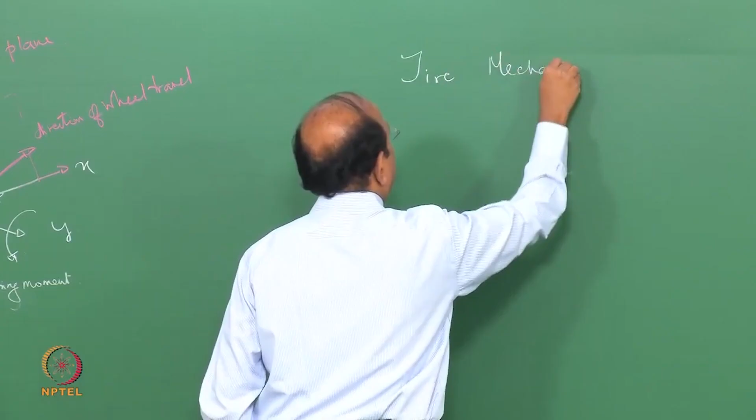Without delving much into that tractor trailer, you have done some assignments, so that will give you an idea. We will now move over to a very important and interesting topic on tires. In other words, we will understand what are tires, and then we will go ahead and understand the mechanics of tires. Mechanics of tires is a very interesting topic as well as a difficult topic.

Though one would say, what is in a tire, I see this every day in every car. What's so important about tires? If you look at an automobile, there are two components which are extremely abused to the greatest extent. One is the tire, the other is the piston rings. Both of them are abused in the sense that they are subjected to all sorts of loads, friction, and so on in their lifetime.

What happens between the tire and the road is extremely important for the safety of the vehicle, whether you are accelerating or braking, and whether you are taking a corner or maneuvering the vehicle. For all these things, what happens between the tire and the road is important. So in other words, we have to understand this carefully.

In the last class, we said that we will dump all the effects that happen between the tire and the road into one constant, and we call this as mu, and we said that this is friction constant or friction coefficient. I put that within inverted commas, friction coefficient, because it is not as simple as what this equation says or what happens in just a block. So friction coefficient is only a simple equation to depict the behavior of the forces, or depict the relationship between the forces. But the phenomena is very deep.

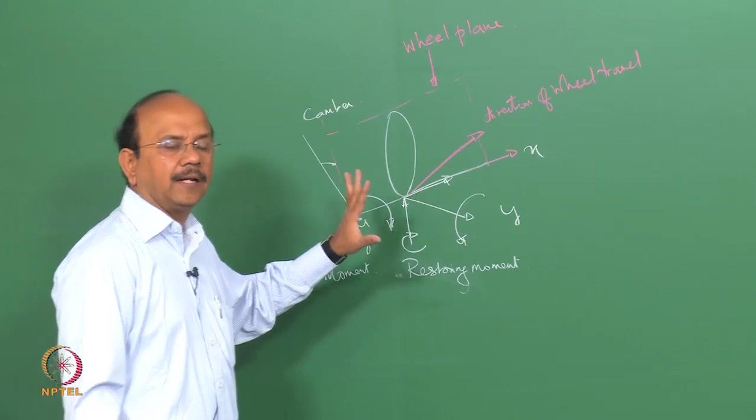Now, before we go further, let us look at just the forces that are acting on the tire. Since all of you have done a course on automotive systems, you know what is a tire and so on. I'm not going to delve too deeply into the specs of the tire, but we will maybe indicate this as we go along. We will not go into the construction of the tire and other aspects of materials, but we will suffice it to understand whatever is required. We will do that right now.

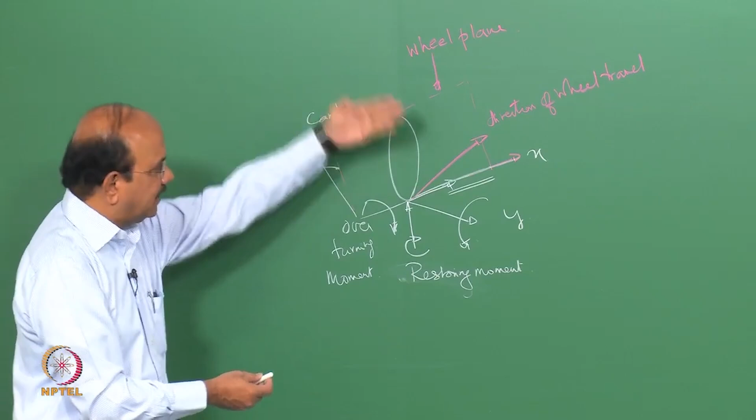So first let us look at the forces that act on the tire. There is a longitudinal force, which is in the x direction, but that force is not exactly along the wheel plane. Suppose this is the wheel plane, then you would see that the tire direction of rolling or travel is not exactly along that direction, but is at an angle which makes, say, lambda or alpha, and that angle is what is called the slip angle.

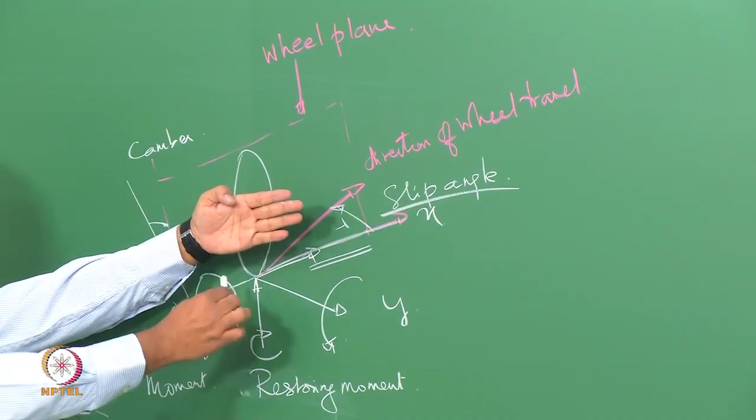Why is it so? We will see that in a couple of lectures. So the first thing is that it's very interesting to note that the tire, as it travels, doesn't go along the plane. Let's say that x direction is the direction perpendicular to the normal direction, or normal to the wheel plane. In other words, the tire does not travel along the wheel plane. It takes a direction that I call the direction of wheel travel, and that direction is at an angle of alpha, or lambda, which is called the slip angle. That's the first thing.

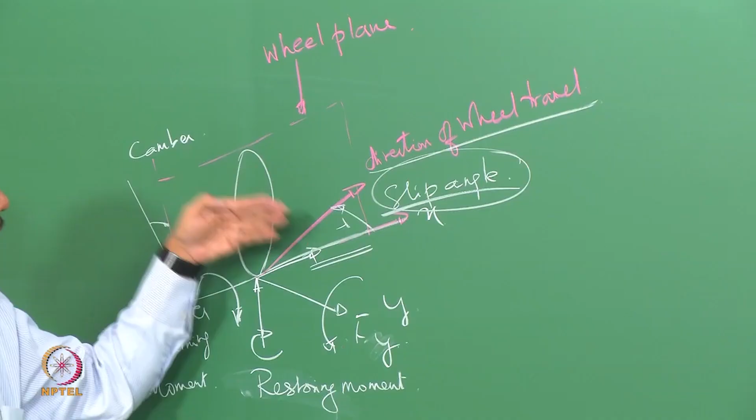There are a number of forces that act, as well as moments that act on the tire. Of course, there's a longitudinal force, along the x-axis. But we modified it by saying that whenever a tire travels, it may not travel along the x-axis. Now the slip angle is necessary to generate what is called a lateral force. If the lateral force is 0, the slip angle becomes 0, and the vehicle or tire travels along the x direction. So in other words, lateral force is developed because of the slip angle.

So we have let's call this as longitudinal force.

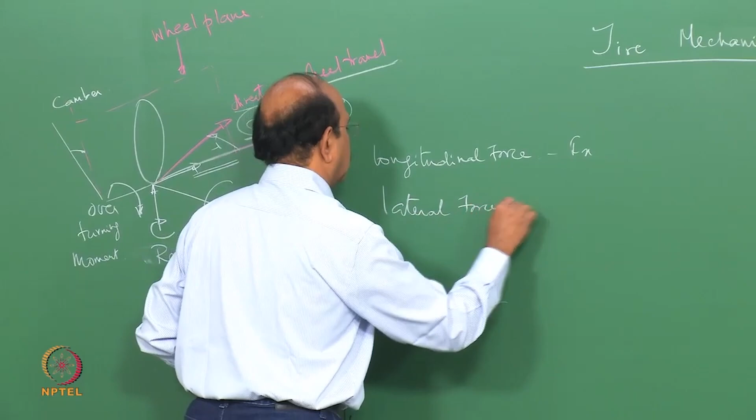That is the Fx force, that is braking, acceleration, and so on. Then we have the lateral force, which is Fy.

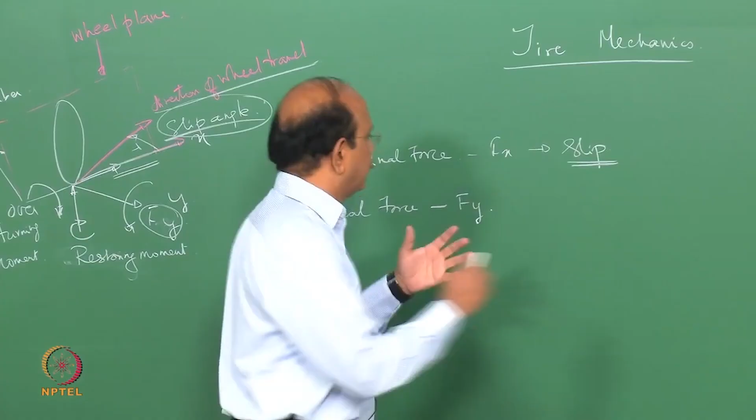This is the result of what is called slip. We will define all these things carefully. The longitudinal force is the result of what is called slip. Very interesting, when there is slip, a longitudinal force is produced. It sounds like an oxymoron, that when you slip, there is a longitudinal force developed. How is that? That's what we are going to see.

So there is a relationship between a longitudinal force and what is called a slip. What is called a slip? I'm going to define that carefully as we go along. So we have a lateral force Fy, and that is due to what is called the slip angle. In other words, when the lateral force does not exist, the slip angle does not exist, and the direction of travel is along the x direction.

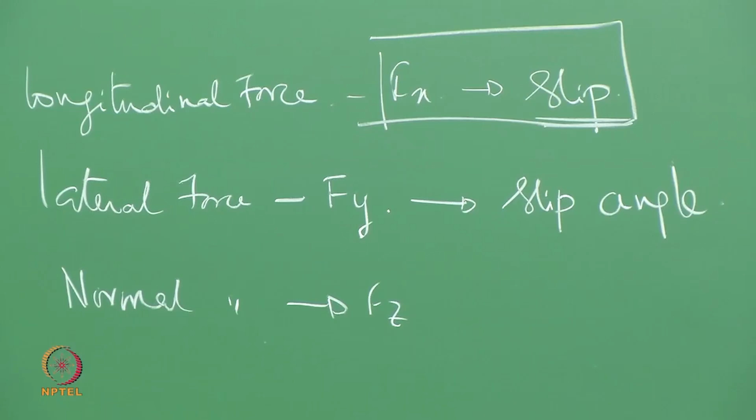Then of course we have what is called the normal force. Normal force, which is Fz, is normal to the ground plane. That is the ground reaction, as we called it in the last class. All the directions have an accompanying moment.

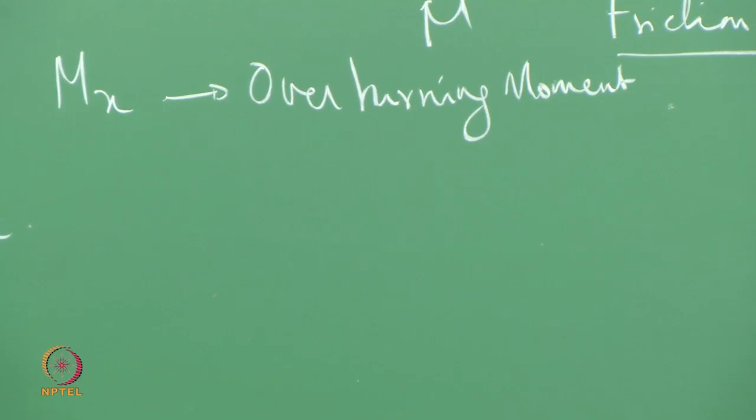Let's look at the Fx force. That Fx force is accompanied by what is called the overturning moment. I would call that Mx, and that is the overturning moment. You have a moment which acts along the z direction, which is called a restoring torque or restoring moment. So here we have what is called the restoring torque or moment.

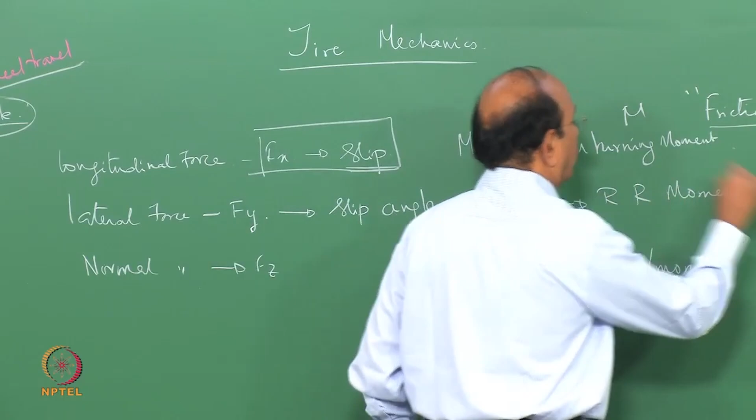And along the lateral direction there is a force as well as a moment, and the moment is nothing but the rolling resistance moment. We said that that moment or rolling resistance torque can be converted into a force that acts in the x direction. So we said that they are equivalent. You can't put both of them. So either there is a moment or there is a force. When we analyze vehicle dynamics, the whole of the vehicle, then we replace the rolling resistance moment by means of a force in the x direction. This is what we saw in the last class.

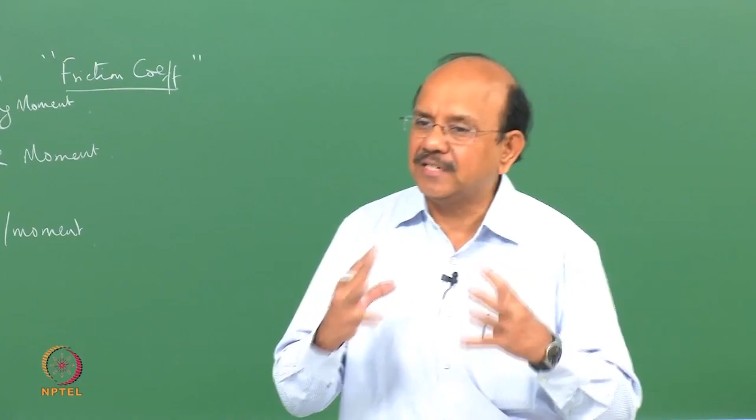So these are the things that happen in a tire. The question is, how is it developed? What is the mechanism of this development of these forces? That's what we are going to see.

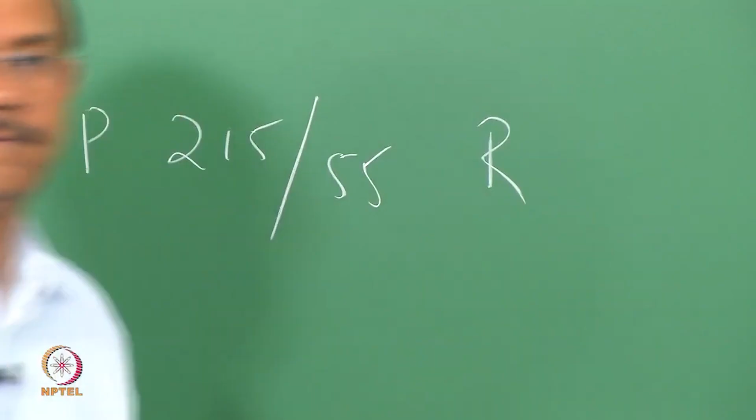All of you know how a tire is specified. If you go to a shop to buy a tire, for example a passenger car tire, you would specify something like 215, then 55 or 65, then R, and then another number like 15. This is what usually you would specify.

Sometimes you would go ahead and specify a number and a letter. Each one of them has a meaning. P is the passenger car tire. 215 is the biggest section width of an unloaded tire.

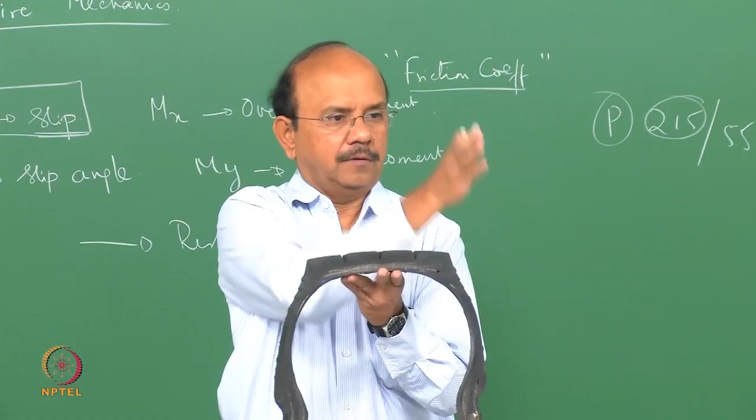Let's look at a section of the tire. So that's a section of the tire. This distance, the maximum width, is called the section width. So you specify that section width. Note that the section width is specified in millimeters.

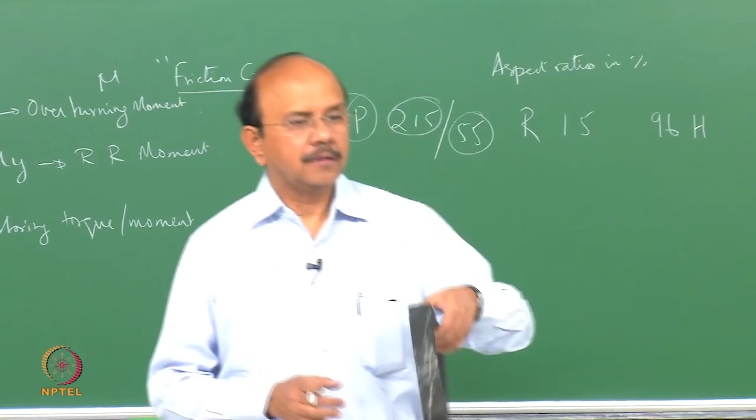Then you have 40, 55, 45, 65, whatever it is. That is what is called the aspect ratio, and it is in percentage. What is the ratio when we say aspect ratio? It is the ratio of the height here, which I would call HT, to the section width.

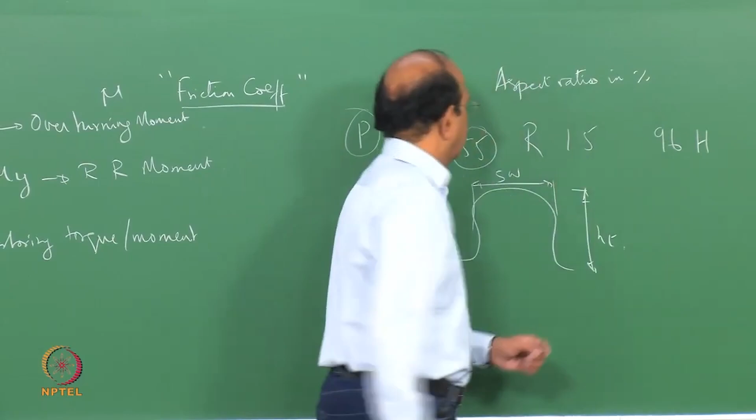So if I have a tire like this, then that is the section width, and that is the height. The ratio of the height to section width multiplied by 100, that is what is called the aspect ratio in percentage.

Lower the aspect ratio, it's called a low aspect ratio tire. They're colloquially called low aspect ratio tires. 35 is a very low aspect ratio tire. In fact, if you see today many high-end cars, you would notice that this height is very small. These are low aspect ratio tires.

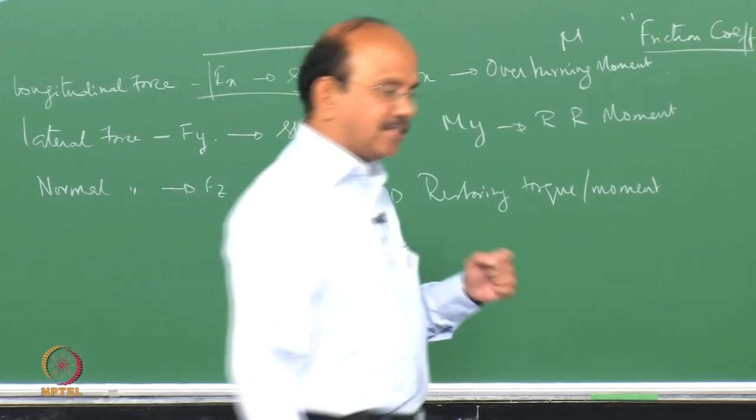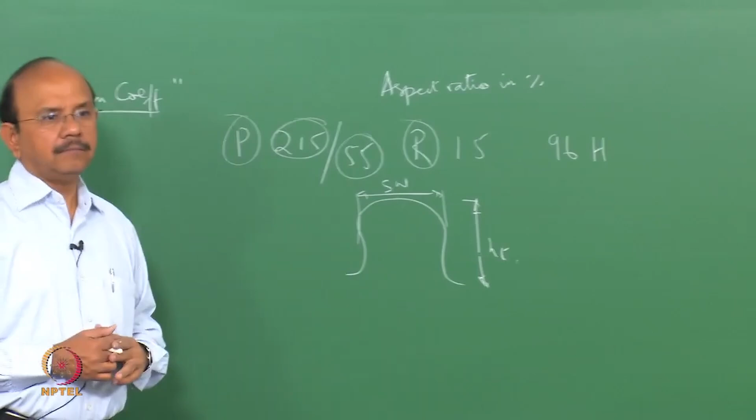R is what is called the radial tire. Today, almost all passenger car tires are radial tires. We still have tires which are not radial in the truck segment. That depends on the country. In North America, 90% or 95% or even more of tires are radial. But in a country like India, maybe about 25% of tires are radial, and radialization is still going on, where bias tires are converted into radial tires. We will see what is a bias tire and what is a radial tire in the next class through some pictures. We'll just note that two types of tires exist: one is a radial tire and another is a bias tire.

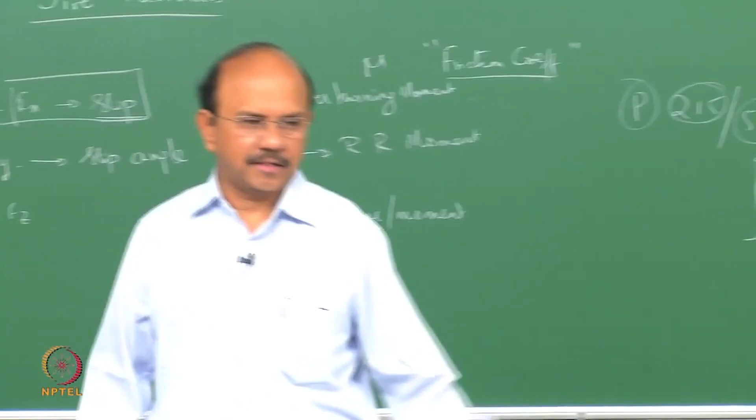We'll just quickly see a section and see what the radial tire is, but we will go from macro to micro. Now, 15 is the rim diameter in inches. So that's the rim diameter in inches.

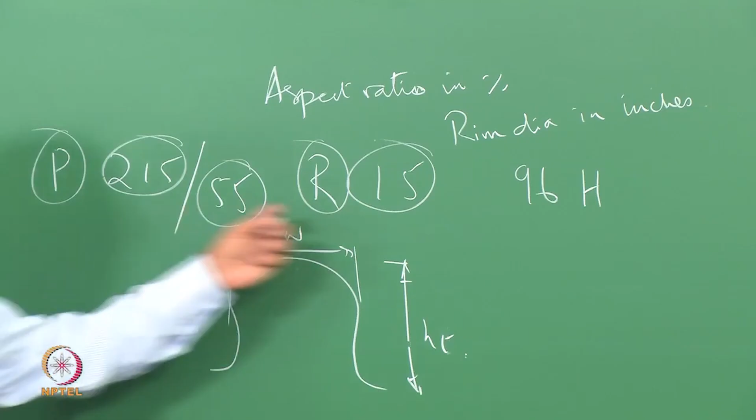Due to some peculiar history or legacy, you have mm combined with inches when you specify a tire. Then you have a load rating—you have a table from which you can find the load rating of the tire. And then you have what is called the speed rating. So you have a load rating and a speed rating.

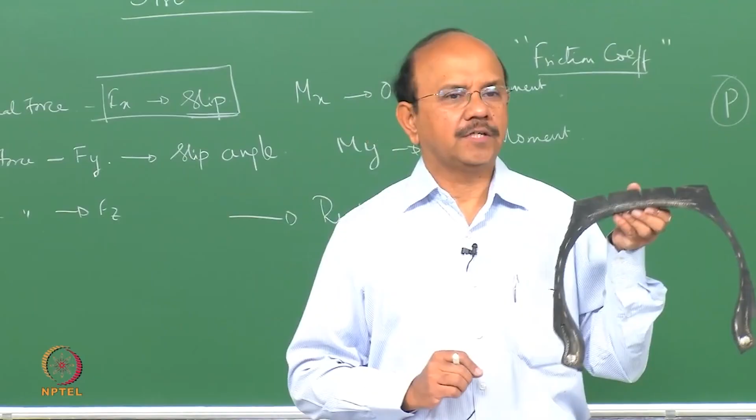A quick look at the section before we go further and explain the micros. That's a typical cut section of a truck tire, courtesy JK Tires, one of the leading manufacturers. You would notice there are a number of reinforcements, and these reinforcements in this tire are made up of steel. You would also notice there are chunks of steel on either side—actually that's what is called the bead. So the rim is here, the tire sits on this rim and it is inflated.

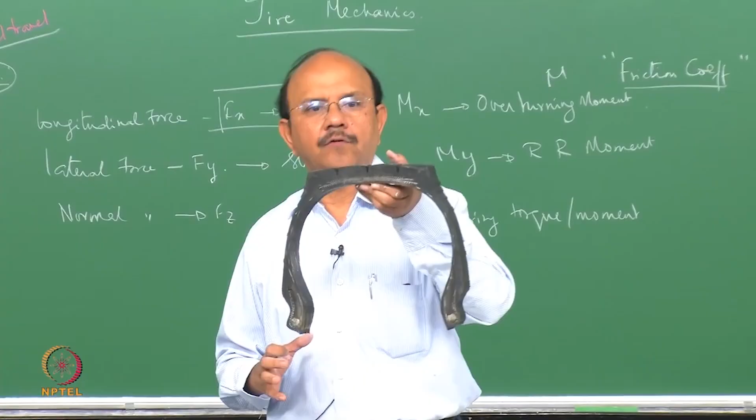There are a number of parts of these tires. We will explain that in the next class, going into the details of what material the tire is made of, how it works, and then look at the different parts of the tires. The way the reinforcement is done, first of all it's not pure rubber—it has reinforcements. Based on how the reinforcement is done, the tires are classified either as a radial tire or what is called a bias tire.

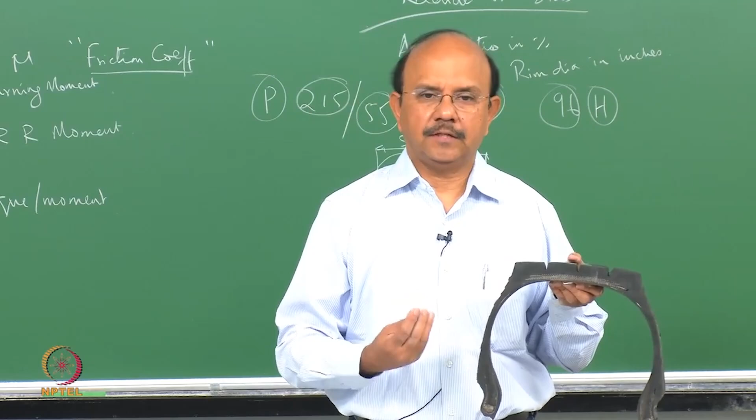Though you see that they are all steel radials, it is not necessary that all the reinforcements are made of steel. Some of the reinforcements, a section of which we will see in the next class, are made of polyester materials, and the belt, as it's called, has reinforcements made of steel. So you can have a combination of materials which reinforce this. The reinforcements are basically made up of steel, nylon, polyester, rayon, and so on.

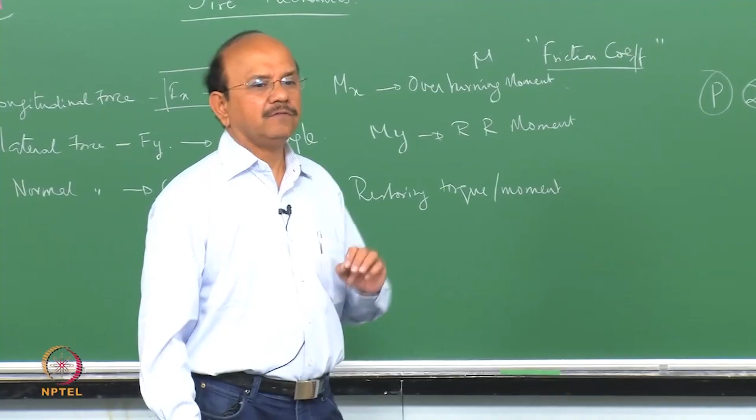Before we delve deeply into tire per se, we will go from the material of the tire to the construction of the tire, just to give you a background. So let's now look at what the materials are and how they behave. All tires used in automobiles basically consist of what are called elastomers.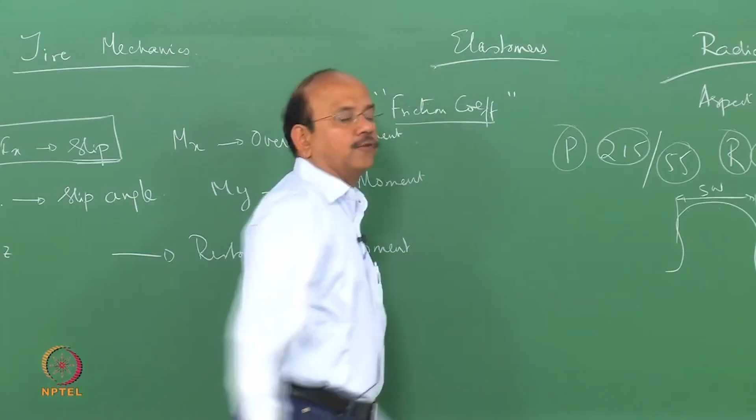Tires are classified into pneumatic tires, which we use all the time, or solid, non-pneumatic tires, which have very specific applications. In this course we are going to look only at pneumatic tires. So the first thing is to understand elastomers and how they help tires develop the forces required to accelerate, brake, take a corner, or maneuver, and so on.

We will go into small bits of information which we will collate together in order to understand how a tire interacts with the road. In other words, we will understand the elastomer, we will understand the road, then we will understand how these two talk to each other in order to develop the forces that are required.

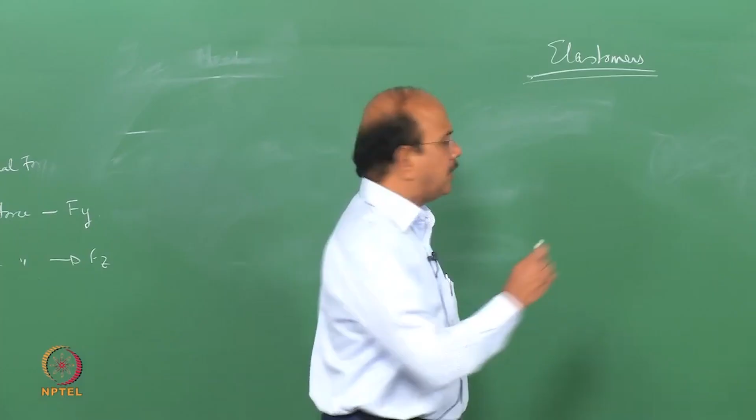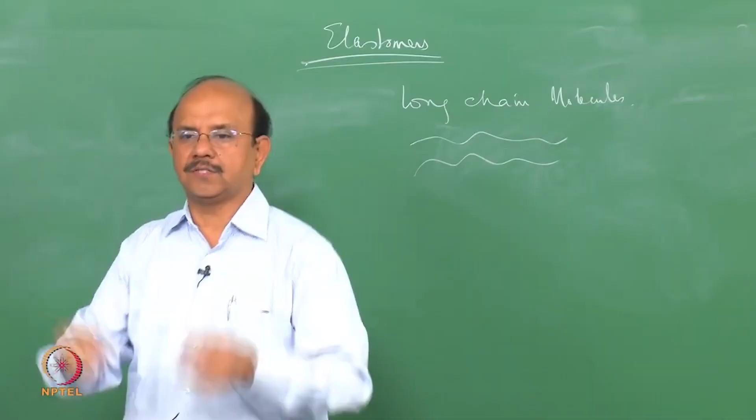Now, what are these elastomers? The elastomers are basically long chain molecules. These long chain molecules are vulcanized through what are called sulfur bonds. In other words, these long chain molecules do not exist independently—it's not that there's one long chain molecule here and another separate one there. These long chain molecules are bonded by sulfur bonds, and that's what we call vulcanization. Now if you leave this long chain molecule alone, it becomes something like a bundle of twine or wool or something like that.

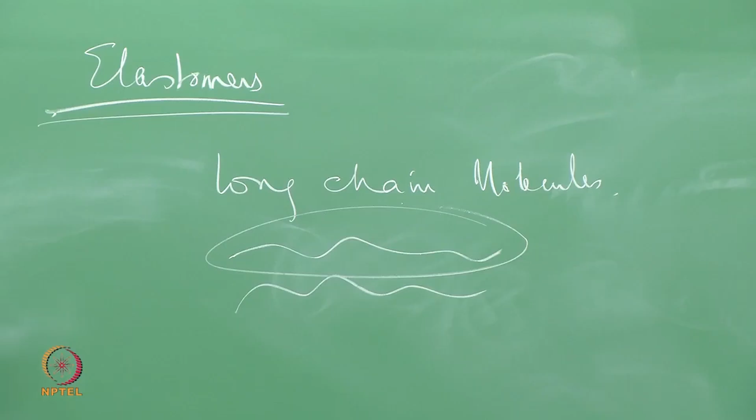It's very interesting to note how they behave independently and how that is different in their behavior when it comes to these molecules. These molecular environments have other molecules as well. In other words, it is interesting to know the difference between how one molecule behaves and how a number of molecules or molecular chains behave. Now, if you look at one molecule...

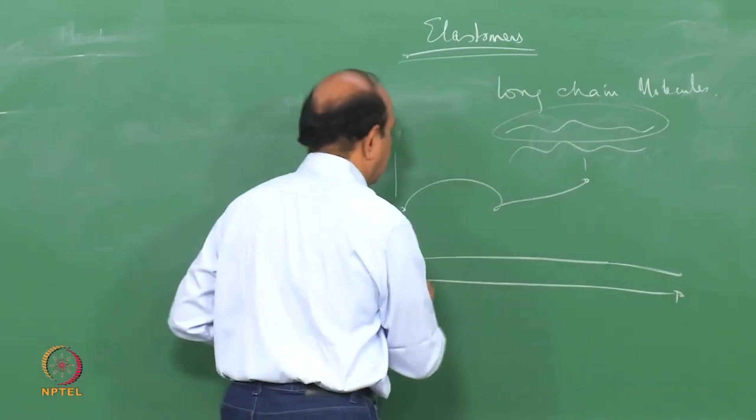Now, when I stretch it, that's the final length. The first point you have to notice is that this stretching is different from the stretching that you would notice in a metal. For example, if you look at steel, steel does not have molecules like this, obviously, and the elastic behavior of steel is due to what is called lattice deformations.

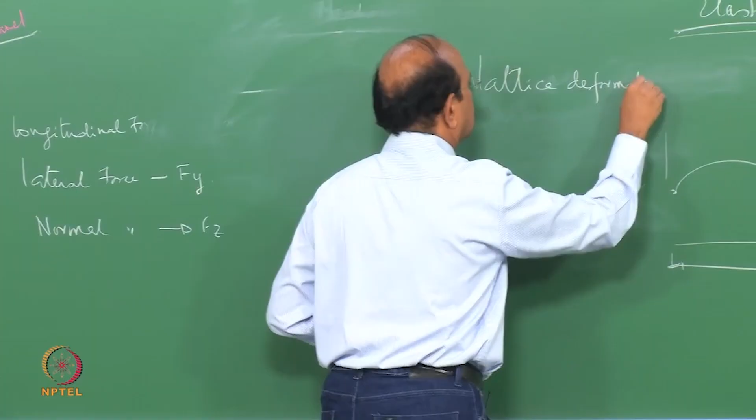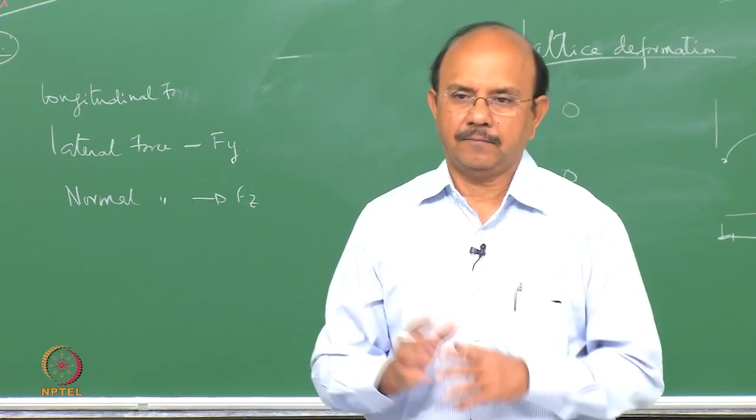You also know that the plastic deformations are due to a phenomena called slip, and slip is due to the presence of dislocations and so on.

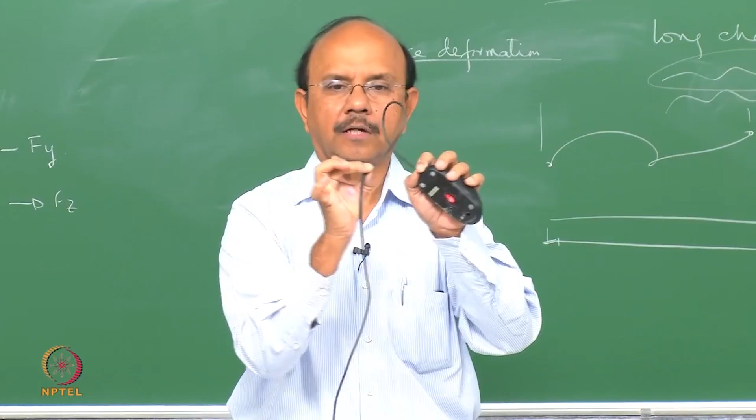Look at this. So you have a wire, say for example, if you take the mouse, let's say that this is the length from my left hand to right hand. This is the length of this long chain molecule as you see it outside. So now let's see what happens. When I stretch it, look at how much I'm able to stretch. Look at how much my hand moves. Actually I am not disturbing the bonds like what I did in the previous case.

What I did was to straighten this out. Look at that difference. So the phenomena of deformation of an elastomer is different from that of steel, and the phenomena is controlled by our good old entropy.

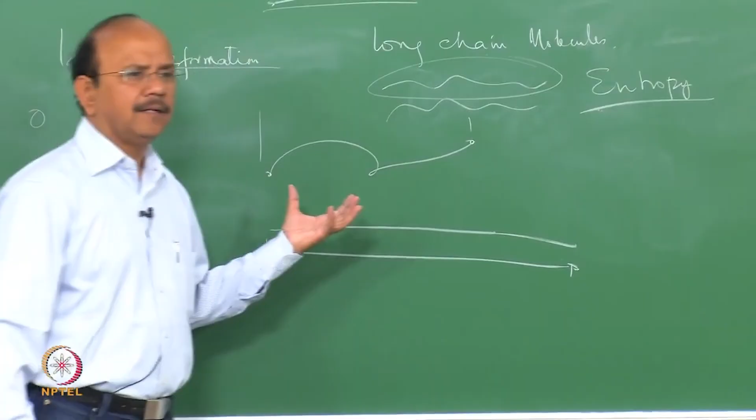By entropy. Now you can imagine that the entropy, which you normally understand it to be - higher the entropy, you would imagine that a very simple way of understanding entropy is that higher entropy means there's more chaos, more disorder, and so on and so forth. This is what you roughly understand, forgetting about the mathematics.

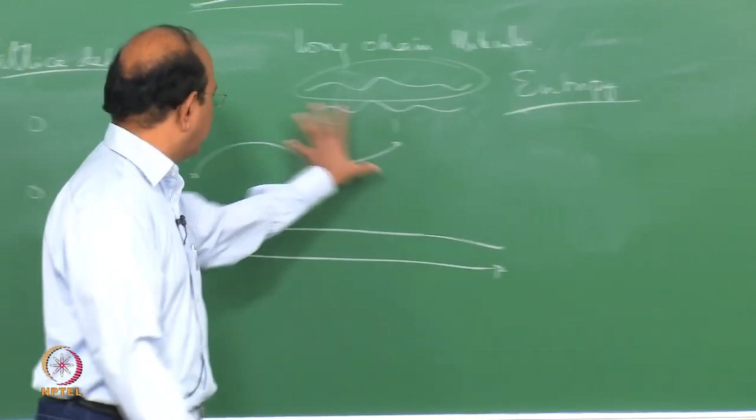Here we say that it is the configuration which decides the entropy. When it becomes straight, the number of configurations that this molecule, this macromolecule, can take is limited, and so the entropy actually drops. So when I leave it, the entropy actually increases, and so it goes back to this position. In other words, there is an entropy change that is responsible for the deformation of these macromolecules.

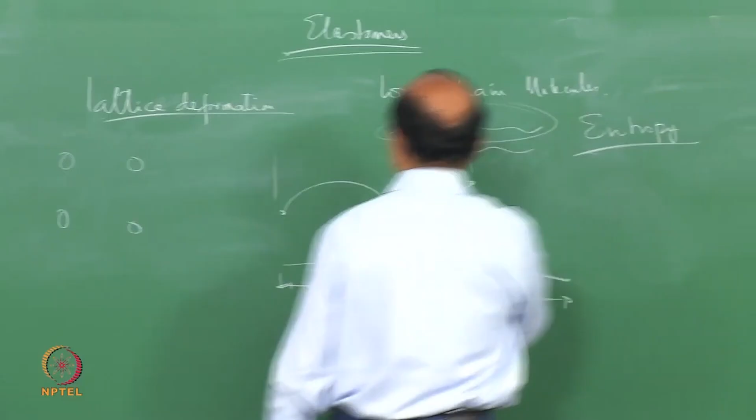So at one level, you can imagine that these molecules are like a spring. You can say I will fix it here, I will pull it. When I pull it, it becomes like this, and then when I leave it, it goes back to this position.

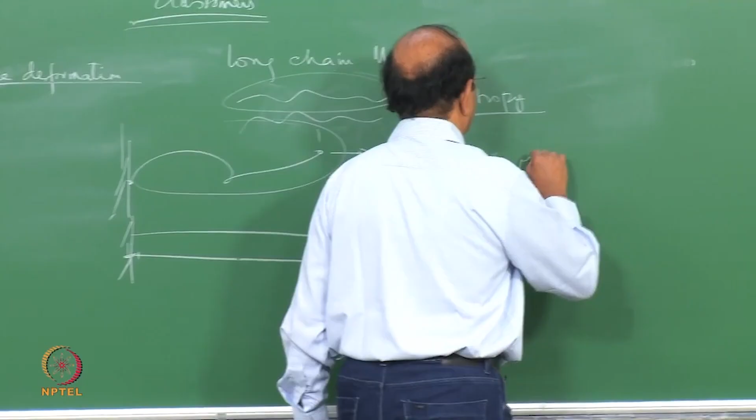You can imagine the same situation when you have these springs which are bonded by sulfur. So if I have a spring bonded by sulfur here, a spring bonded by sulfur here, this spring bonded by sulfur, this spring bonded by sulfur, and so on. This keeps increasing, and so you apply a force and a similar thing happens.

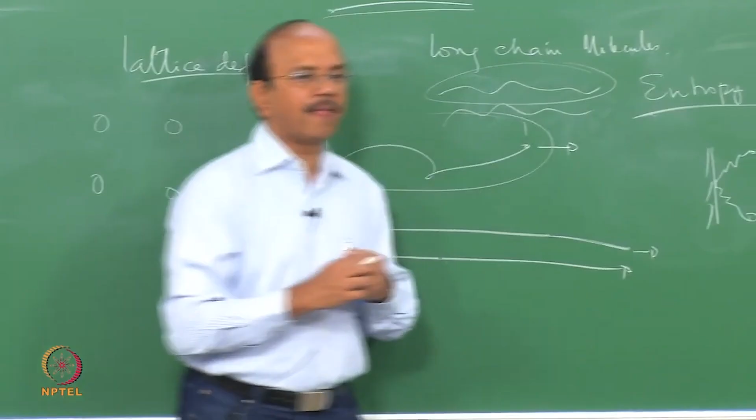So on one hand, this can be modeled as a spring. Don't forget that these are long chain molecules, though they are bonded, they are not arranged neatly like that. So when they are pulled, these long chain molecules start interacting with one another or with itself and so on. In other words, the long chain molecules have some sort of friction - it's not actually friction, but you can say it's some sort of a friction between the other molecules.

So when I pull it, they also interact with other ones, and that gives a very interesting effect, which is the viscous effect or the dashpot effect - the viscous effect or the dashpot effect.

You can, for a moment, imagine that these molecules are in a tube. This is called the tube model. The elastomer consists of a number of tubes into which these molecules are placed, and these tubes start interacting with one another as the chain goes.

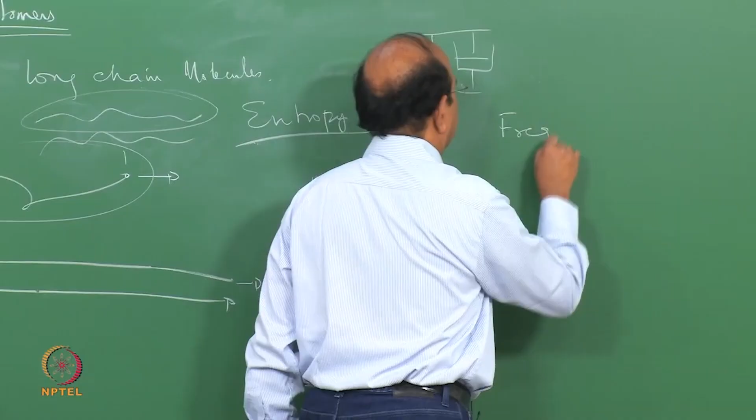Because of this interaction, there is a viscous part. Two factors become important in their interaction: one is what is called frequency, the other is temperature. These two become important, and interestingly, the mechanisms are similar, hence there is a relationship between the two.

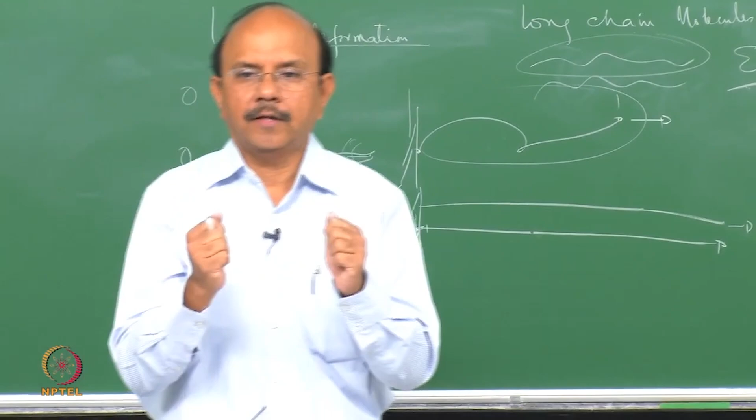What do I mean by frequency? Frequency tells me how fast I'm going to pull and release it. I can do that slowly, say 1 cycle per second, 10 cycles per second, or I can do it very fast, at 10 to the power of 8, 10 to the power of 10 cycles per second. Now what is the effect of this frequency on the mechanism of interactions?

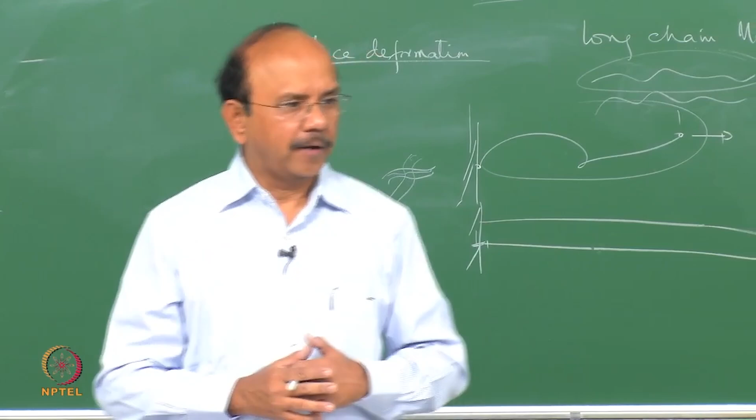At very low frequency, since we had a viscous effect, which means velocity plays a role, when you apply the force, the chain has time to react to that force, and hence it would react almost in the same fashion as you applied it. Since you release the force again slowly, it has time to react and come back to its original position.

So at low frequencies, the time available is quite large, and because of that, the molecules have the ability to expand and then come back. In other words, at low frequencies, it behaves something like a spring, and so all the forces are dumped into the spring.

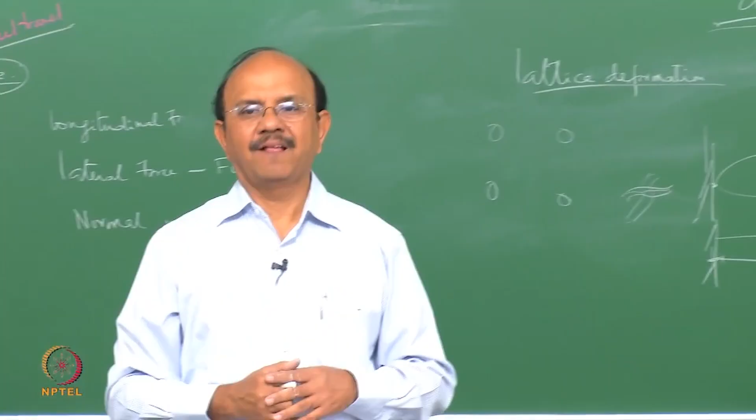So the force here, say for a very simple model, is kx, where x is the displacement, and for a dashpot it is always cx dot. So the forces that act are able to get back—in other words, the whole rubber behaves like a spring.

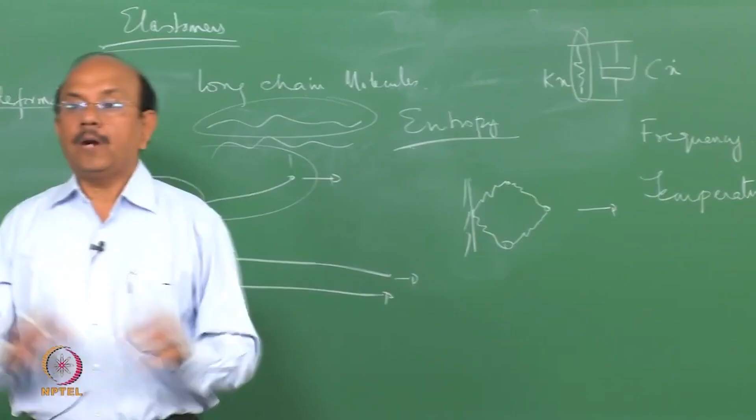What happens when I increase it? Let's look at the other end of the spectrum, where I'm applying the force at a very high frequency. Then the material does not have time to get back to its original shape.

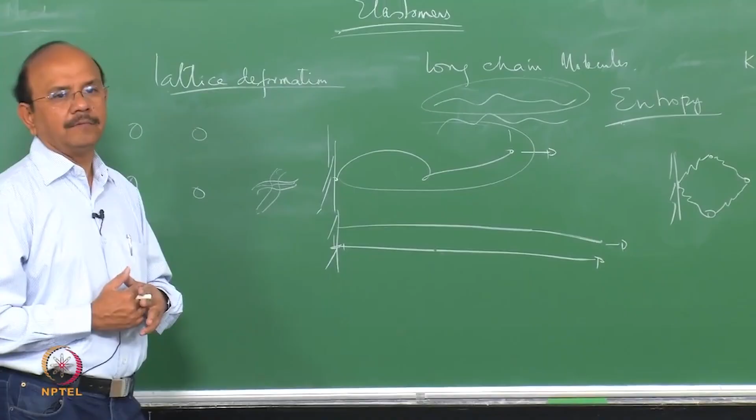Because by the time it gets back, you've applied the force again—it's a viscous effect, we said. So what happens? It would behave like a very stiff material, because when you want to release it, it doesn't come back, and when you apply it again, it won't go back. So it becomes very, very stiff.

So at very high frequency, the material behaves as a very stiff material. In between the two: at very low frequency, it's a nice spring because it has enough time to recover, and at very high frequency, it doesn't have time at all to recover, hence it becomes very stiff. In between the two, it has both a spring and a dashpot effect.

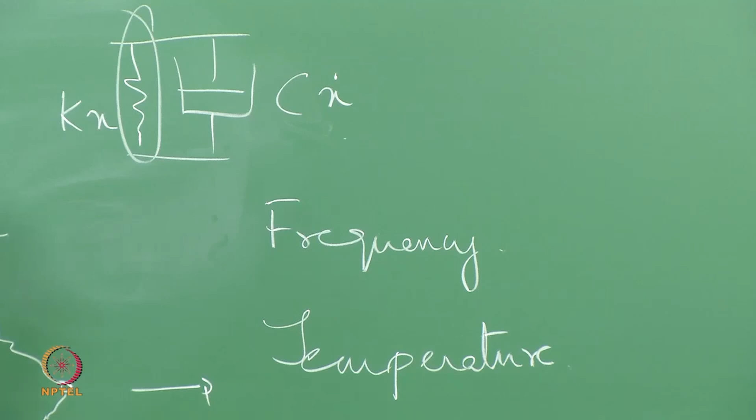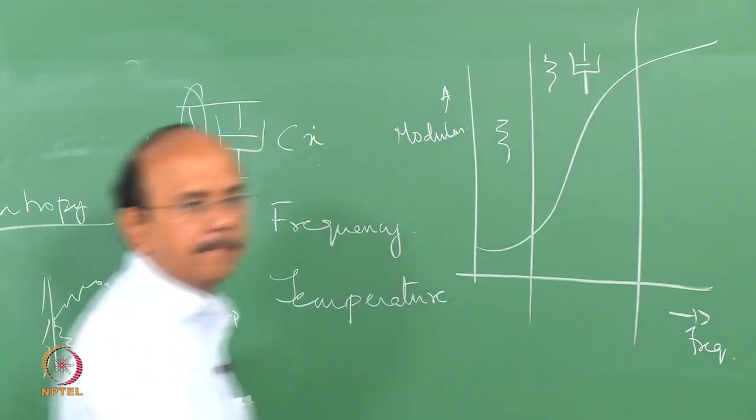So if I now plot frequency versus what we call the stiffness, or modulus, how would it be? It would be like this, and like that. Here is the spring region, here both effects are present—spring and dashpot—and here it is quite rigid.

So these are the three effects. To summarize: at low frequency, the time required is good enough for the rubber molecules to come back, so they are springs. At higher frequencies, they don't have time, and hence become rigid. Our region of interest in this whole thing is this middle region.

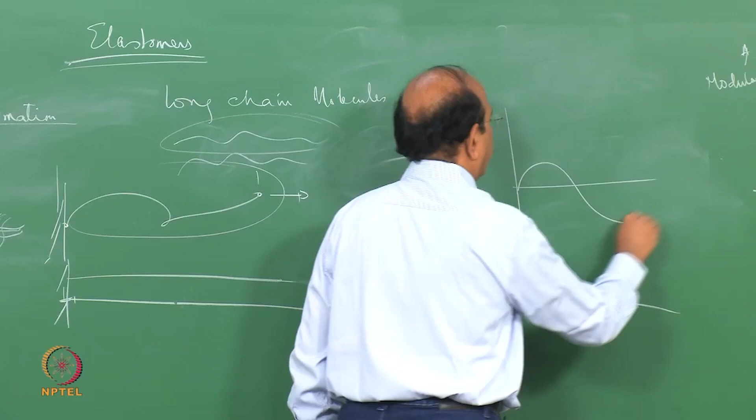If I now plot a stress-strain curve for that region of interest, which I would call the viscoelastic region, how would it look? Let's say I apply the stress like this—then the strains do not follow the stress. If it were an elastic material like steel, the strains would follow directly, with the ratio being the Young's modulus. But here, because of the viscous effect, there is a time delay.

There's a time delay between the stress and the strain, or in other words, there is a phase lag between the stress and the strain. That phase lag is what gives you what is called hysteresis, an important property of the rubber, which gives advantages and disadvantages in the functioning of the tire.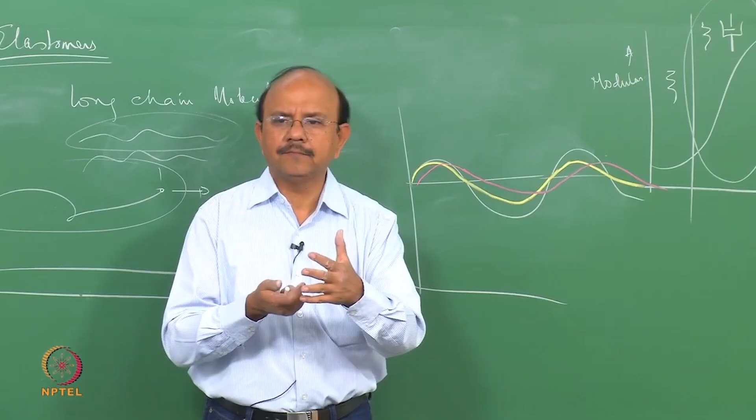So in other words, what does it mean? It means that when I apply the stress, the strain is not immediately developed. It takes time to develop. When I release it, it doesn't immediately get back to its original position. It takes time for it to get back to its original position. This is a very important property which we will see more and more.

We will call this phase lag as delta. This is the phase lag between the stress and the strain. Now let us look at the effect of temperatures and then get back to this again.

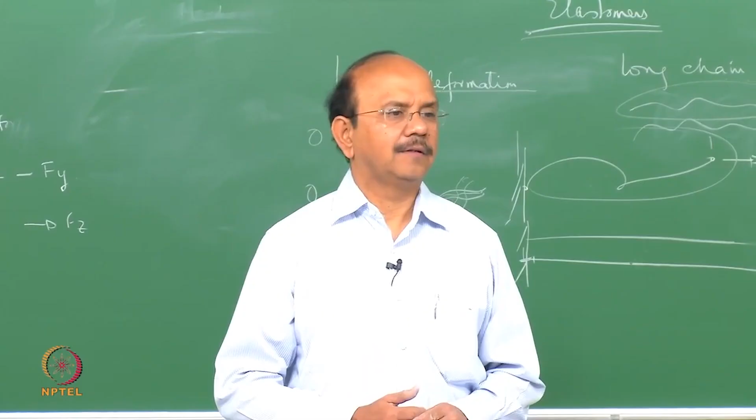The temperature has just the opposite effect. When the temperature is high, the temperature aids these. So let's say I'm fixing the frequency and taking the temperature to be high. What would happen? When the temperature is high, it aids in the recovery of these molecules to its original shape, and hence it would behave as if you are at a low frequency.

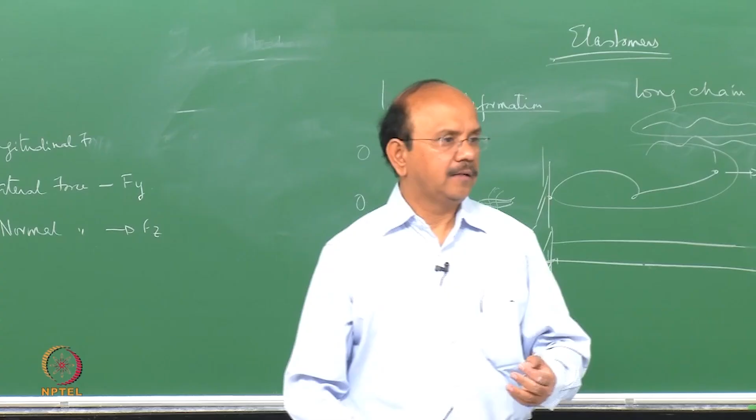So if I now plot the temperature, at high temperatures, since it aids the molecules to recover, the modulus would be something like this. At very low temperatures, what would happen? Just the opposite — the molecules are under difficulty to get back to its original position, so the modulus is high. At intermediate temperatures, the modulus is between the two.

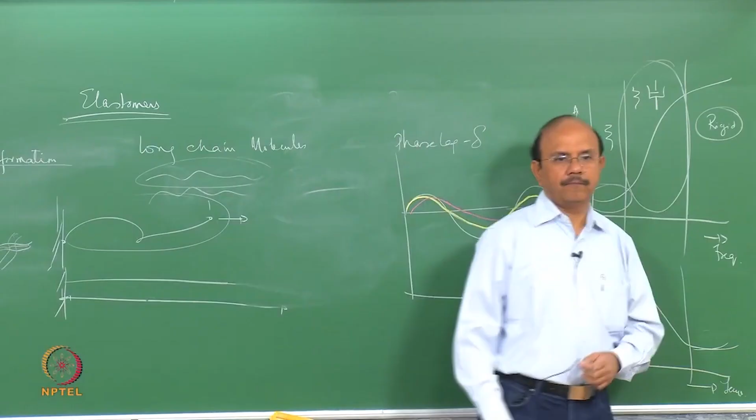So if you compare this graph with this, you would notice that the temperature effect is the inverse of the frequency effect. We will see that there's a relationship between the two, which is called the WLF relationship.

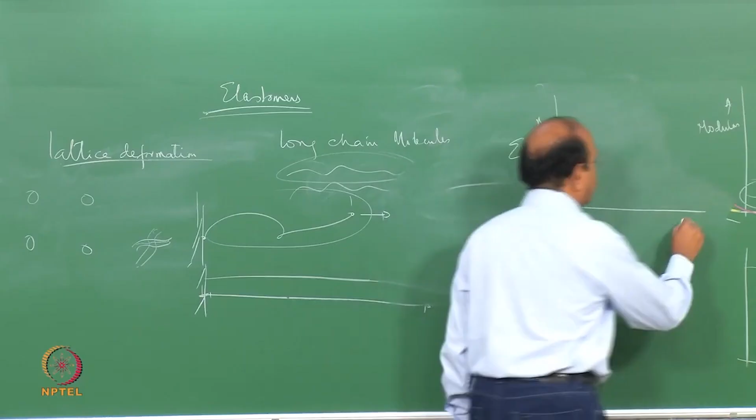Now, if I plot for the frequency effect, the energy loss versus the frequency, then the curve would look something like that. There is a central region at which the energy loss is high — that's that region, and that's the region at which we are going to use our tires.

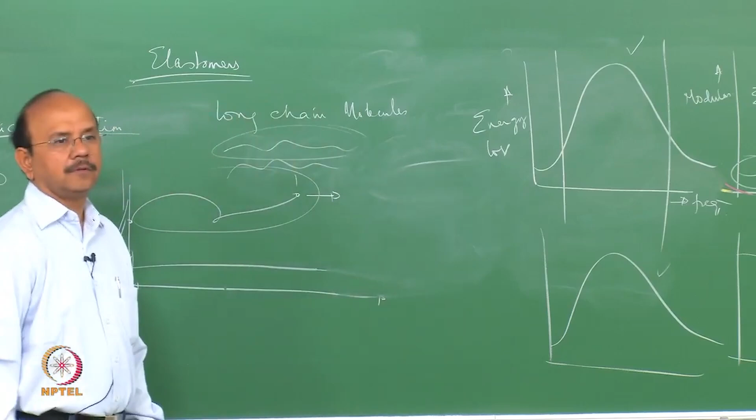The same case for temperatures would also look something like this. The temperature also has the same type of behavior. There is one particular temperature of interest called the glass transition temperature, popularly denoted by Tg, below which the material is vitreous and above which the material becomes very soft.

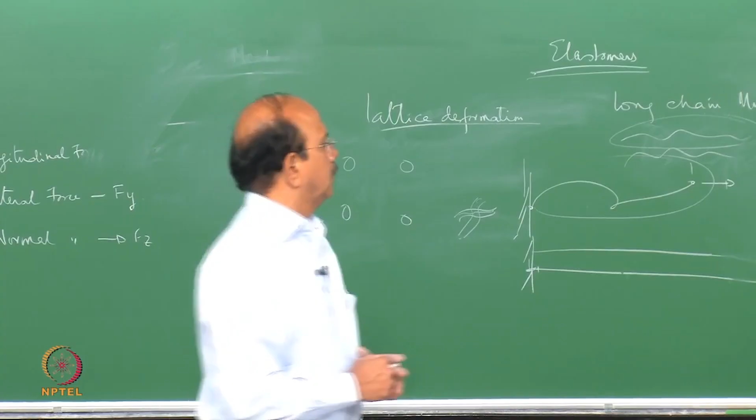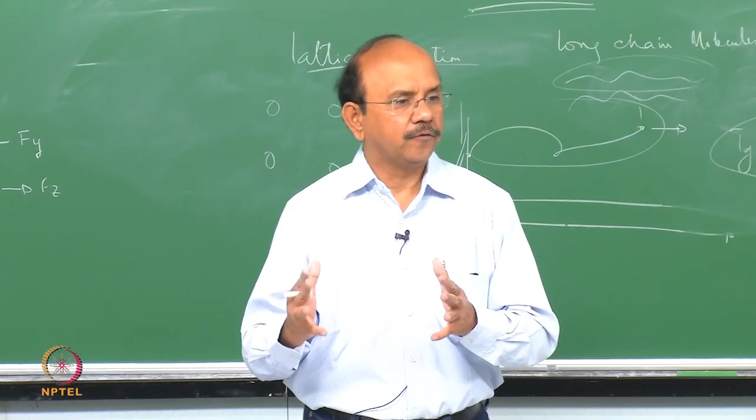So the glass transition temperature would obviously depend upon the frequency, because both of them have an effect. In other words, if I do a test at one frequency at a temperature, and then do the same frequency at another temperature, the effects would be different. Vice versa, if I do a test at one temperature with two frequencies, again the effect would be different. So there is an interaction between these two — an equivalence between the frequency and the temperature. The equivalence is inverse.

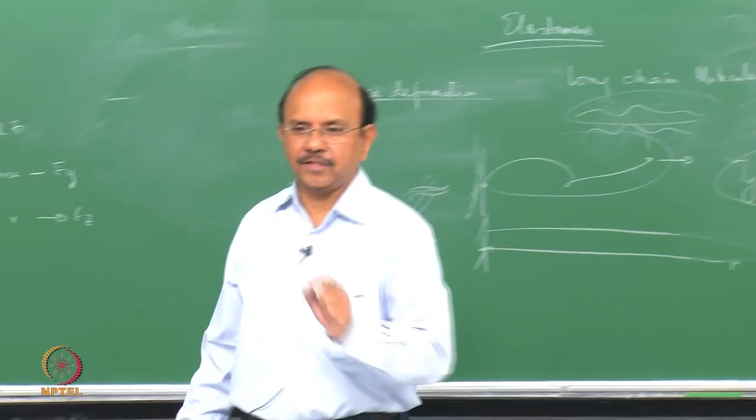So it is usually said that when the frequency increases by a factor of 10, there would be a change of temperature of 7 to 8 degrees. When I increase the frequency, would the temperature increase or decrease? Decrease, okay? So you go this side in frequency, you would come the other side in temperature. There are equations for this, given by Williams, Landel and Ferry — the WLF equations. We will not go into the details, but we will understand this more physically.

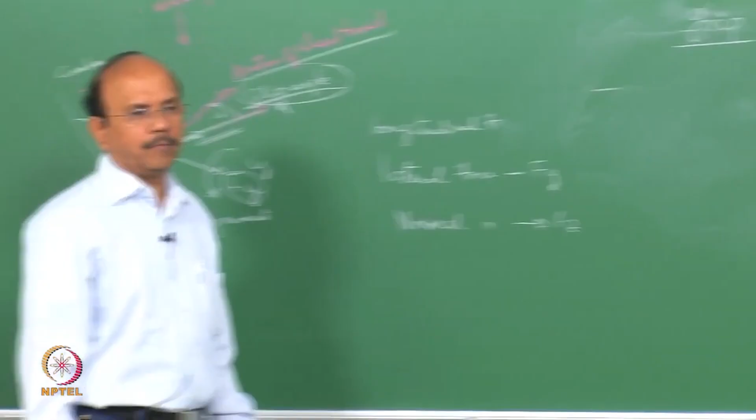Now, why are we talking about this? How does the behavior of elastomer help in the development of, say, grip? That's the first question we are going to answer. Let's define what is meant by grip. So we are going to now go into the micro level — say this is the tire, and we are going to sit at the interface between the rubber and the road to understand how this concept applies in those circumstances.

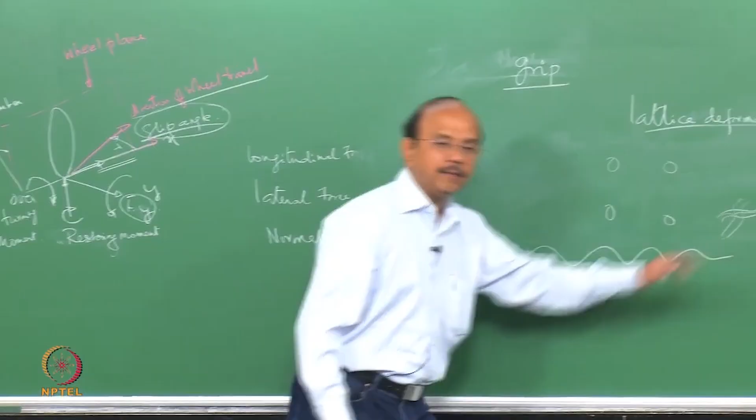One of the things we know about the road is that it has what are called undulations. The undulations can be looked at from a macro viewpoint or from a micro viewpoint. How does this rubber interact with the road is our next question, given that we have these two kinds of roughnesses — that we will see in the next class.